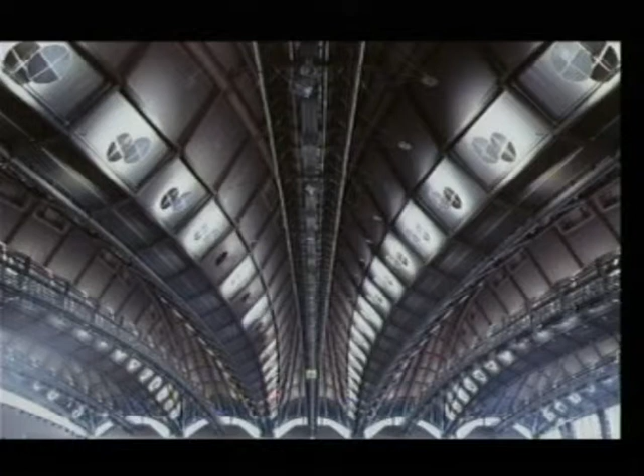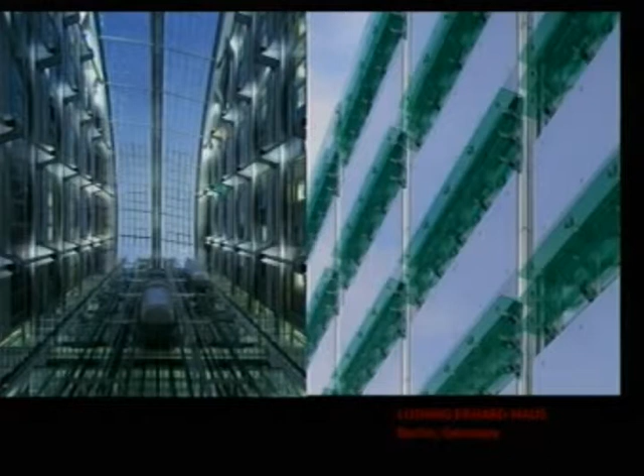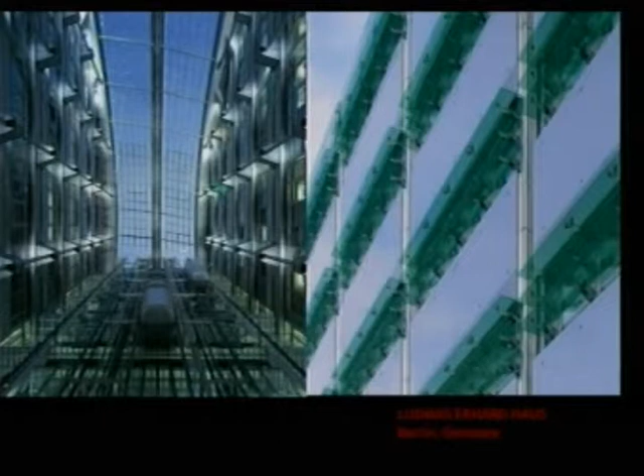Now this goes on to Ludwig Erhard House in Berlin. There was a slide of the outside earlier, and this is the lift shaft and the atrium. One interesting thing about the technology is the lift cars were made by a panel beater who makes bodies for antique rebuilding of antique motor cars, and he made all those lift shafts for us and was very glad of the work, I think.

So for instance, you could have a huge ice rink or cinema or whatever in here over the years that the building is there. So it's a very high level of urban flexibility, and I think that's a particularly important issue when building a very large piece of a city - to make it so that it can be changed and used for different things over a long period of time.

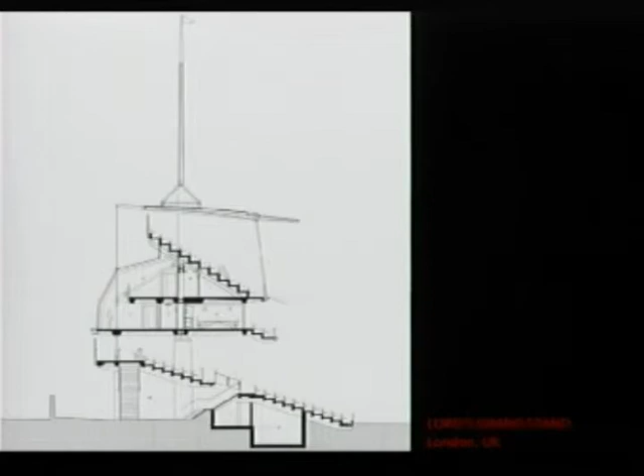Here, just as a grandstand, we did Lord's cricket ground. I suppose the interesting thing to say about this is that we demolished an existing stand, and that stand was an absolute classic of bad design, in the sense that 60% of the seats had restricted view. So when somebody hit the ball in cricket, it disappeared out of your vision and then came back in again, if you were lucky.

The criteria was that we were to have no columns at all. I said, well, you can't actually have a stand with no columns. But we have one column in the middle towards the back, and the rest of the stand hangs from that structure. Very good views had by everybody.

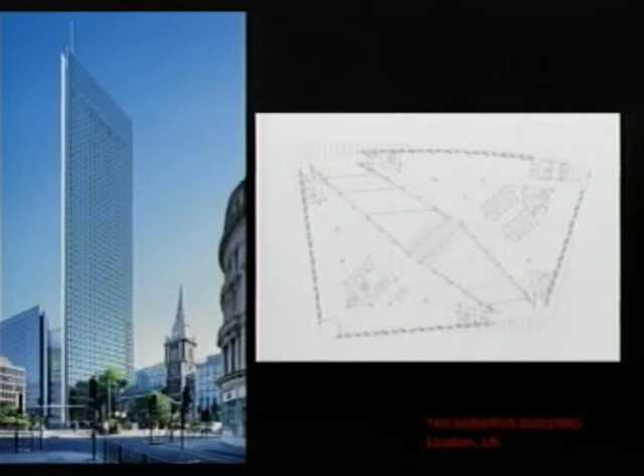Here was our biggest, our tallest tower building, which we obtained planning permission for in London. It consisted of two kind of triangles with an atrium between them up to a certain point. This was a fantastic experience in fighting something through a planning battle, really, worked on with Arups over a number of years. Very ecological building with a reactive skin, and we were trying to work on the idea that for the majority of the year you didn't use air conditioning for this building, by a very complex double skin development.

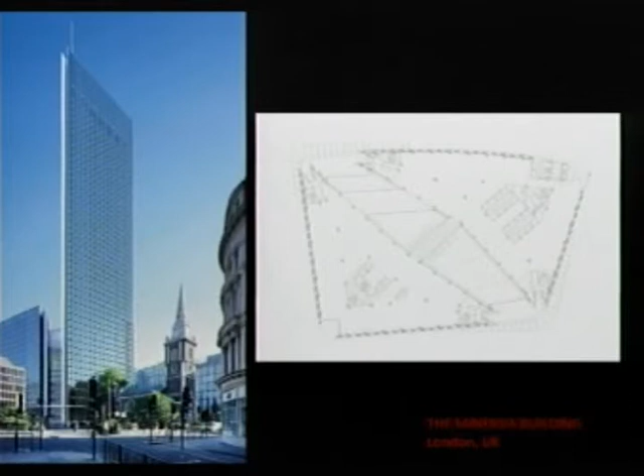At the same time we had developed another building for this same site, which was half the size. In the end, in economic terms, the client decided they'd make more money by building a building half the size, which was rather a sad outcome for us. But actually, the building is going up, and again Arups are the engineers. This building was Tony Fitzpatrick originally, who very sadly died a few years ago.

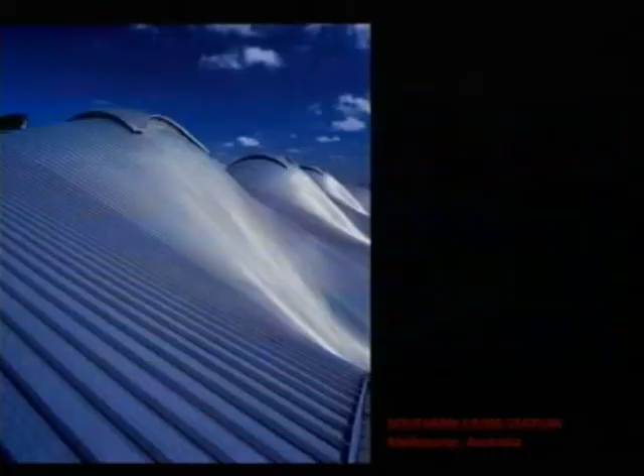Then we turned to the building in Melbourne, Australia, Southern Cross railway station, a lot of work. I haven't got the diagrams, but you can see from these kind of humps like snow drifts or sand dunes.

They create zones in the roof space to collect the hot air, which is then extracted at the top. There's quite a complex calculation showing the way the skin heats up and draws the hot air to the top of the building and extracts it. The winds come from every different direction, so we couldn't make a ridge going across the building. We had to make these humps. Needless to say Australians can think of lots of rude words for them, but sand dunes, I think, is probably the best one we've got.

And there it is from the roof. The interesting thing about this one is that when you come down now onto the platforms from an overhead walkway, we've got something around about 40,000 square meters of roof here. We collect all the rainwater, and we've used what used to be the pedestrian underpasses as water storage, to collect the rainwater for use in watering the parks in Melbourne, because they're very, very short of water.

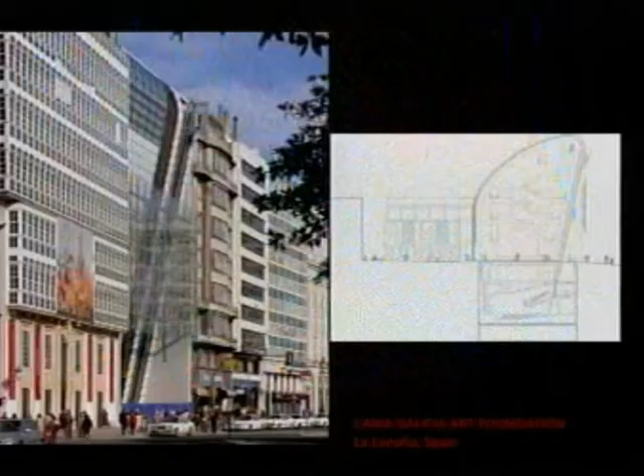This is a more recent art building in Coruña in Spain, on the waterfront. Perhaps an interesting aspect of this, I haven't got many slides of that, is the way sometimes you, as an architect, have to deal with things.

We already started building the building, and the client announced they wanted to have a lecture theatre underneath it. We said, but it's solid rock. And they said, well, we don't mind how much it costs. Of course, they didn't mean that - they meant they didn't mind how much it cost within reason. We had to dig down into solid rock. It took two years extra time. Below sea level, we had to put anchor piles in, going down, I think, 150 meters, to hold the building down, to stop the sea water level pushing it out of the ground.

But they got, I think, what is quite a beautiful lecture theatre, and I somehow couldn't help admiring them, because the idea of building, they wanted to have poetry there. So if they want to have poetry, why not? And they do concerts and poetry readings. Somehow I thought it was a wonderful cultural aspiration.

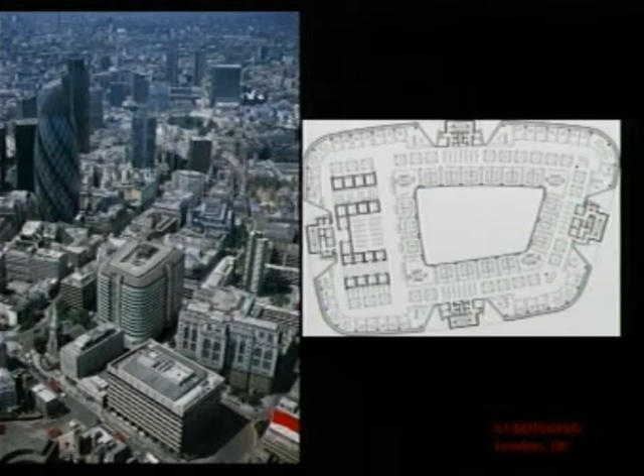The interesting thing about that building is the bank of lifts - each lift shaft has 2 lifts in it, and they can go up and down independently of each other. It's a concept which absolutely terrifies me, but is looked upon as perfectly safe and normal. I keep asking, do they have springs on the roof of the lift underneath, in case the top one comes down on it? But apparently the technology is so good now it's 100% safe, and Thyssens have done several installations in Germany. So we'll be watching that with great interest.

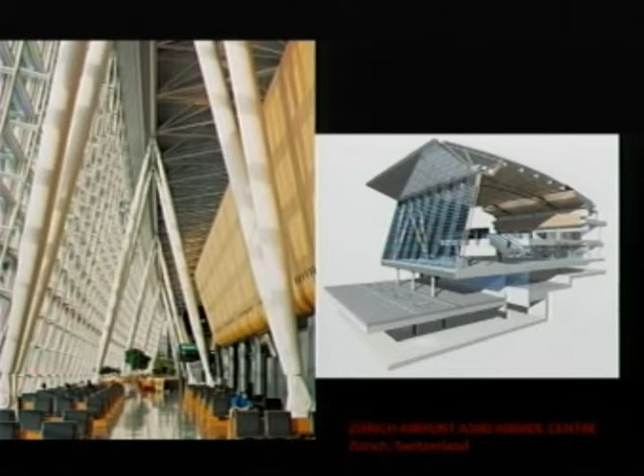This is Zurich Airport. Not far from here, we redid the entire front of the airport, again with a complex skin on the front of the building, because we felt it was important to see out over the airport and the aircraft. But it was southwest facing, so the heat gain problems were terrific, and we had to have a very complex array of louvers on the outside to stop too much heat gain coming in. We also tried to control the shopping, which is always the worst thing that happens in airports.

As to the greenness of Rolls-Royce cars, there's quite a nice story. They've just had their centenary - they've been producing cars for 100 years, and 97% of them are still on the road. You might think that's quite a green statistic, because of course the old ones are classics now, probably kept in garages and taken out once a week, but they're all still on the road. If we took that approach with all the cars we drive now, where parts can be replaced and the car renewed, we'd be a lot better off, although the car manufacturers wouldn't be so well off.

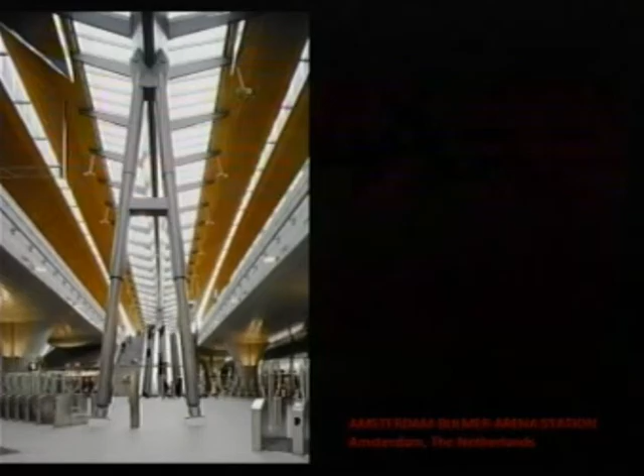This is Bijlmer Station in Amsterdam, a high-speed train station. This is an area which can be pretty rough - it's the entry to the main football stadium at Bijlmer, the Ajax Stadium in Amsterdam. Part of our brief was to try to humanize it and make people not want to vandalize it. So far, it's been quite successful in that respect - people seem to quite like it as a structure, and the access underneath it is all quite nicely finished.

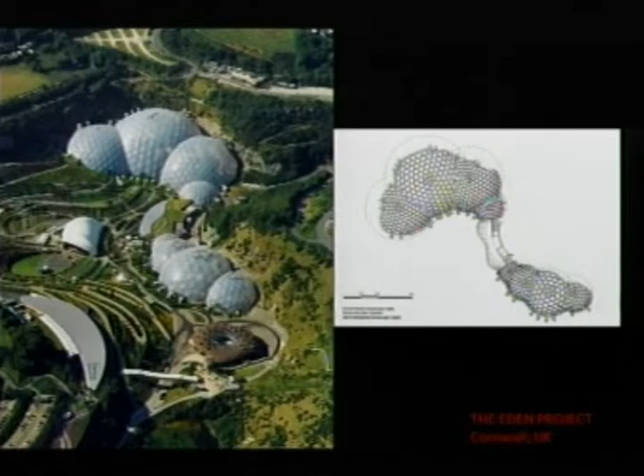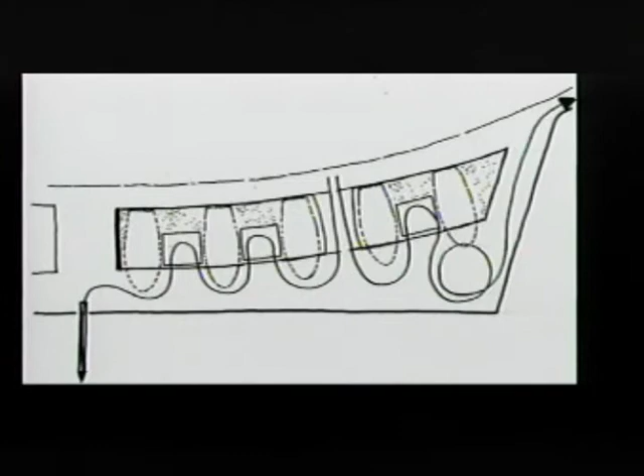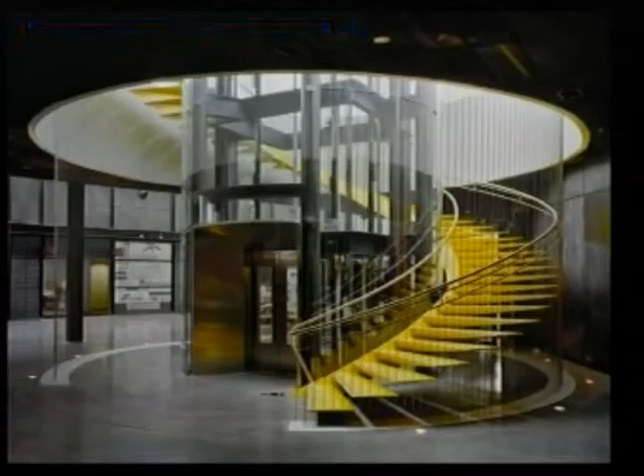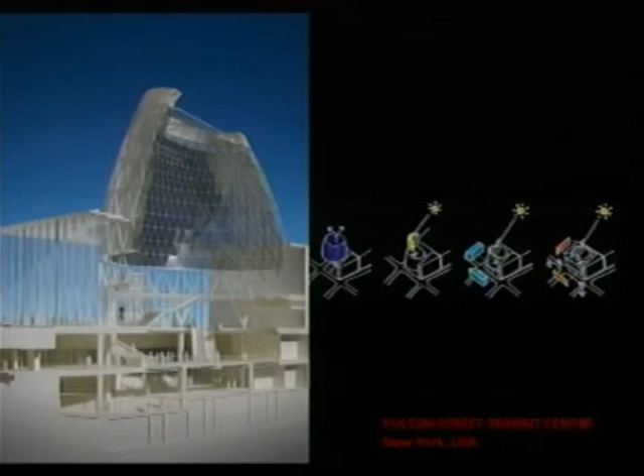This is Fulton Street in New York, near one block from Ground Zero, a huge concourse where 7 subway lines cross over, and we make the connections between them. And there it is from the outside. And then, I think finally, you might recognize this street map.

This is our station, our scheme at the Garibaldi area. I'm not entirely sure what images I've got of this, but look, we'll soon see. Here's the site plan, and you can see this quite peculiar shaped building, which comes to one end of the whole scheme where the tower blocks are going up next to that piazza.

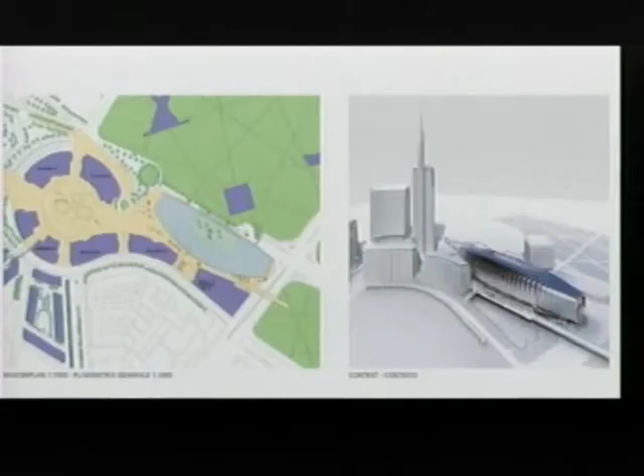The idea here was to have an absolutely standard piece of exhibition space. It's 2 levels, completely rectilinear. I don't think there's a section in the other direction, but these 2 halls are immense and completely rectilinear, and then around it we wrap this kind of snake-like skin. Oh, here we are.

Here's the plan view, so you can see the scale of that exhibition hall. If you talk to any exhibition promoter, they only want completely rectilinear black box kind of space, which doesn't make a terribly exciting building. So the idea was to give this some kind of a face to the outside, to the people of Milan who weren't actually using it.

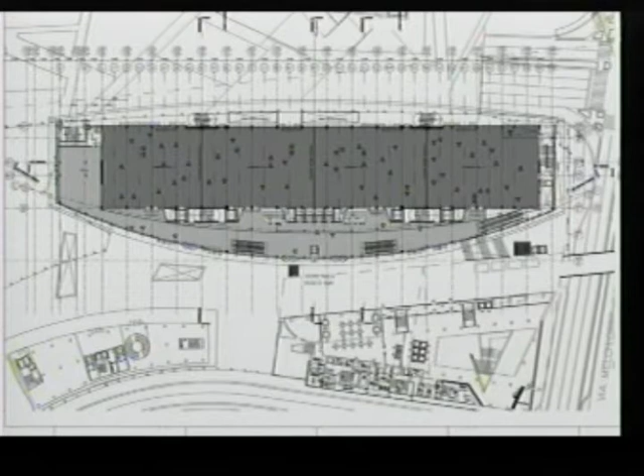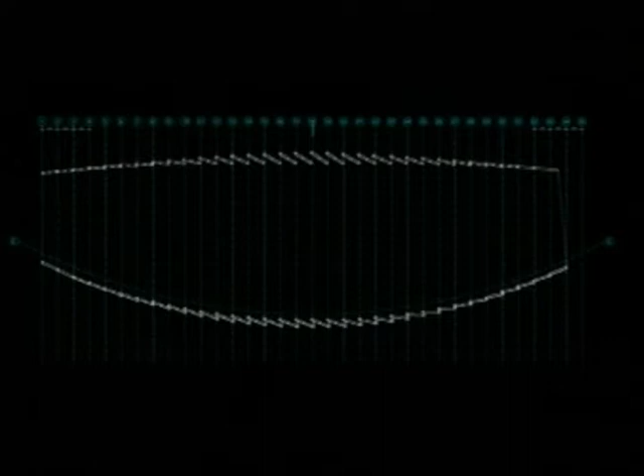So you get this concourse, and all the lifts are outside the black box area, and then we wrap the whole thing with a kind of skin made up out of folded plywood ribs which wrap over the building and open up in various places to let in daylight. You can see here how we open them up and let glazing come in. This is how the skin developed to wrap over it.

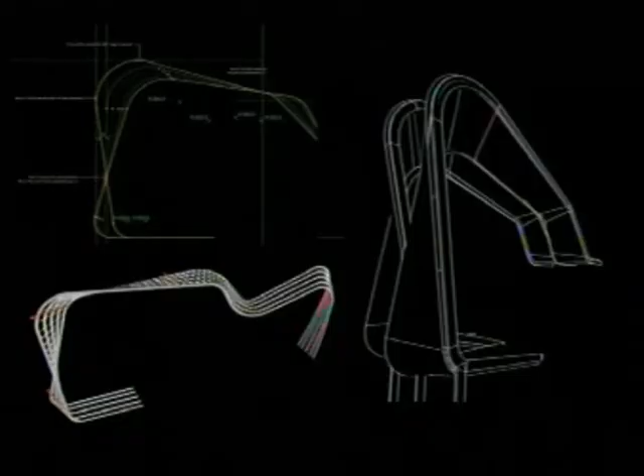Then at the end of the building, we had this idea of having a vast digital screen which showed what was happening inside the building, what kind of exhibition was taking place. The idea of this was to have at least one remaining exhibition building right in the center of Milan, even though the whole exhibition park is moving to the outside. This will be going up as part of the project which is already underway, which you're all aware of.

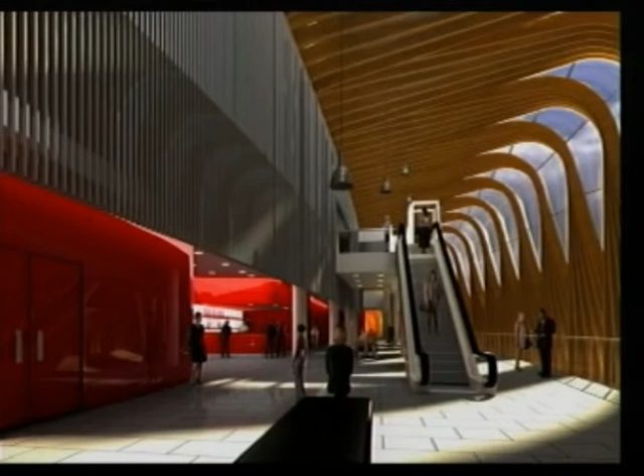Here's an interior view of that, and there's the exterior skin. It's a big project, this—you can see from the scale of the people. And that gives you clearly the idea of how the skin opens up.

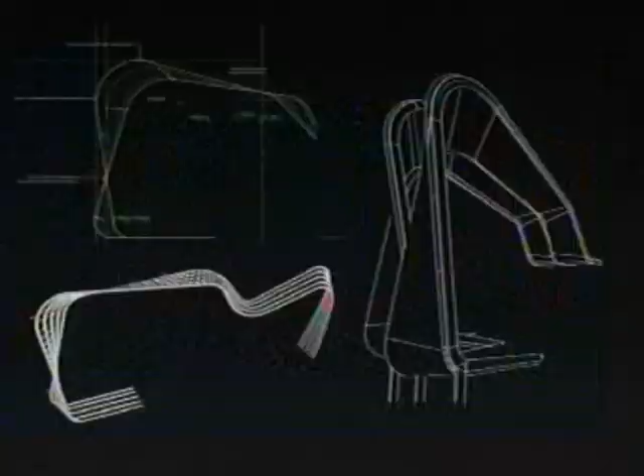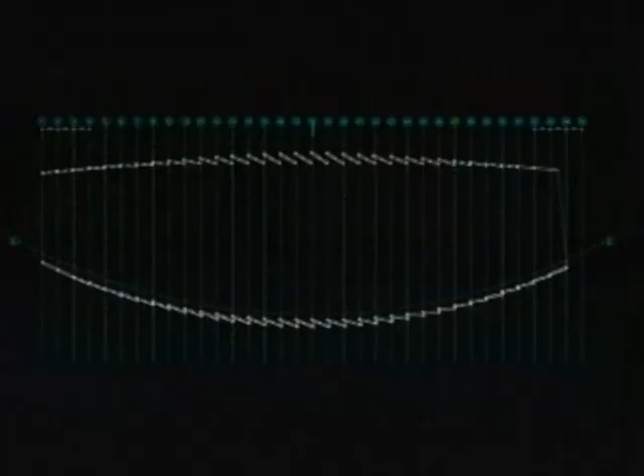Well, I think that's the end of what I have to say. I normally like speaking with lots of details on the screen, but I hadn't planned to do that today because of my lecture last night. But I hope that's given you some idea of the sort of projects we do and how wedded we are to this concept of architecture and engineering, and of the fact that details matter so much.

As I finished my lecture last night, I'll finish today and say, I think the forces on us now to be sustainable and to be responsible with our use of energy should—and I say should—be influencing architecture much more than they are so far. But I hope to see those forces of sustainability and energy saving shaping our buildings in the future, so you can look at the buildings and see why they look the way they do, because they've been designed to use the right materials and build responsibly. So in a sense, we could perhaps be entering an age where buildings are again celebrated for their function and efficiency and brilliant use of materials rather than simply for style.